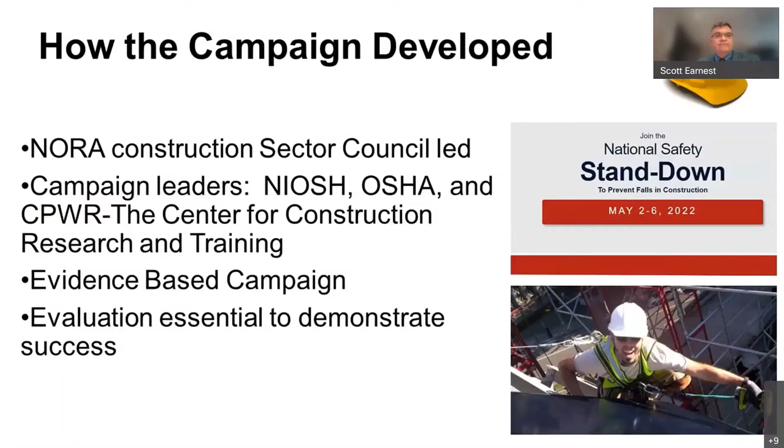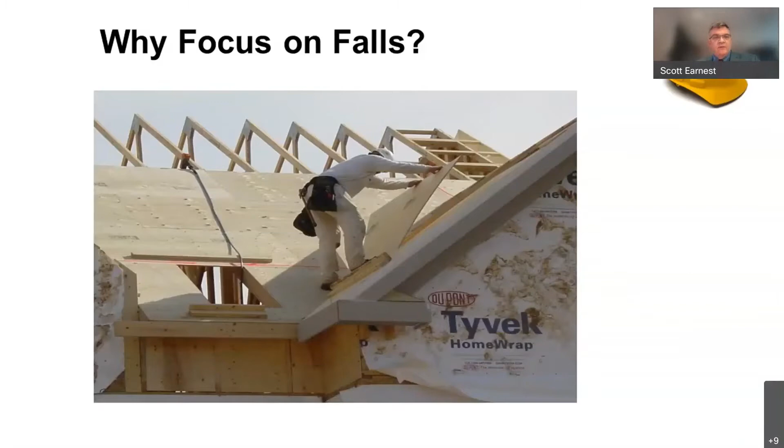Well, again, falls are the leading cause of deaths in construction and unfortunately have been for many years. In 2019, there were 401 fatal falls out of 1,102 total fatalities in construction, and many of those deaths were preventable. By helping to raise awareness about the hazards of falls from roofs, ladders, and scaffolds, the campaign and the stand down are national efforts focused on reducing deaths from construction falls.

Just want to say a few words about the Construction Focus 4 as defined by OSHA. In 2019, the Focus 4 represented 709 deaths, or 64% of all construction fatalities that year. Fatal falls to a lower level climbed to 401 deaths, accounting for more than a third of construction fatalities that year, a 25% increase over 2018.

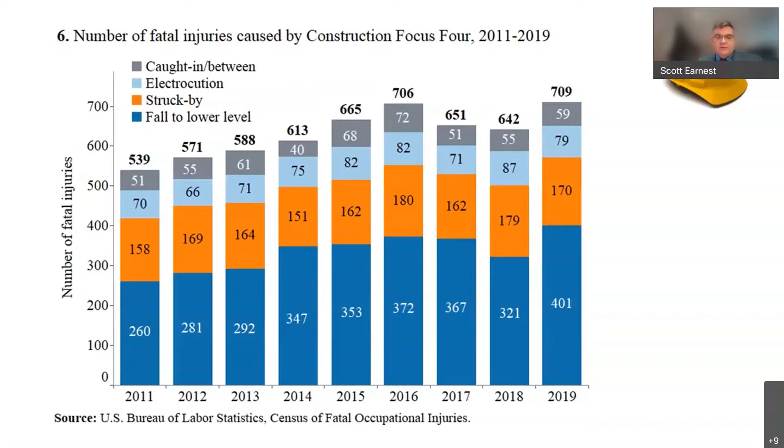And if you look at the other three hazards, caught in or in between, electrocutions, and struck by, they're significant, but they're not to the level or to the number of what falls is. So again, they're all important, but we're really focusing on falls today.

The NIOSH homepage and the resource directory points to the campaign website and the stand down. It also has links to many different resources and tools related to falls and fall prevention. There's also links to the OSHA website, the CPWR website, and I wanted to say CPWR maintains the main campaign website for the overall event.

Now I wanted to talk about looking at falls on a year-round basis. The stand down is 1 week a year, but saving lives is a year-round priority. And here are some reasons to consider expanding your event beyond just the 1 week in May. First, job sites change and crews come and go, but you may have new workers who miss the stand down. Workers have various levels of experience and training, and periodically updating safety training can and will help save lives.

It's human nature to become complacent or overconfident about safety. Scheduling periodic events can re-energize everyone and help to focus on fall prevention. And then lastly, implementing an ongoing fall prevention program is one way to show management commitment, improve supervisory leadership, involve workers in safety, and conduct training.

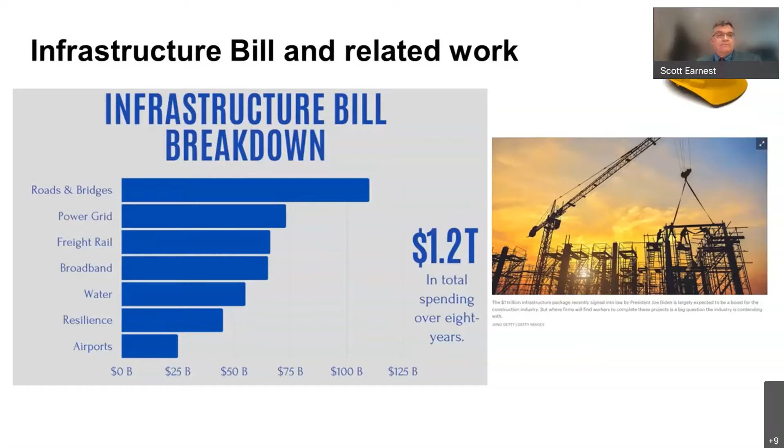The next few slides are information from the NIOSH Fatality Investigation Program. I've got two examples of some fatalities that occurred through falls in construction. The first one occurred in 2017. It was a 52-year-old drywall company supervisor who was setting up mobile scaffolding in the living room of a new home when he stepped onto an unsecured plank in order to hang a piece of drywall.

The metal walk plank that he was standing on flipped on its side, throwing the victim to the subflooring 11 feet below. When EMS arrived, the victim was pronounced dead at the scene, injuries to his head and to his neck.

Before installing scaffolding guardrails, the victim stepped onto the unsecured plank to hang the drywall. His coworker said there were no guardrails because there was insufficient clearance up to the ceiling. The metal walk plank flipped on its side, throwing the victim to his death 11 feet below. Again, when EMS arrived, they could not resuscitate.

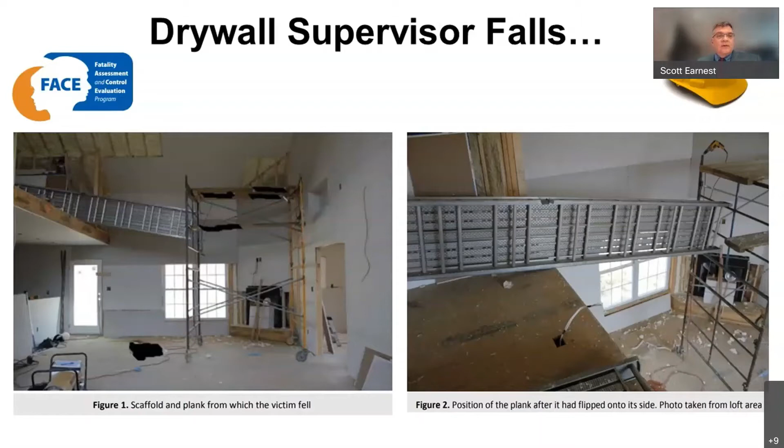In terms of the report that was written after the fact by the investigators, there were a number of recommendations, but the bottom line is fatalities are often the result of many contributing factors in a sequence of events. The investigator identified the following contributing factors in this incident: the fall exposure itself, the misuse of the walking platform, and a lack of fall protection.

Recommendations from the investigators included jobs being designed to minimize fall exposures, making sure that employees are using the proper equipment for work. Employers should ensure that scaffolds are fully planked and decked. And also, workers on scaffolds should always use fall protection, including guardrails or personal fall arrest systems.

The second FACE investigation was another residential roofing fatality. In this case, it was a 37-year-old Hispanic laborer who worked for 1 day, removing and replacing shingles and cleaning up debris. He was wearing a hard hat and a personal fall arrest system that included a full body harness, a lanyard, a rope grab, a roofing anchor, and a 50-foot lifeline.

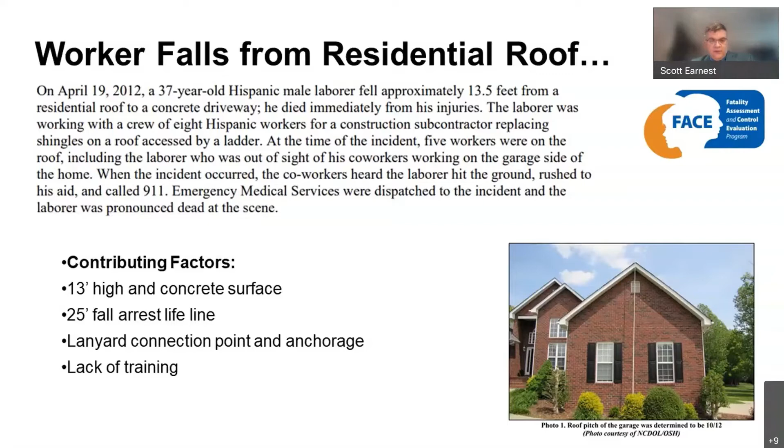This shows some more images from the actual accident. It's believed that the laborer lost his footing, slipped and slid down the roof, falling more than 13.5 feet to the concrete driveway below. During the investigation, they found that the anchor for the laborer's personal fall arrest system had pulled from the peak of the roof.

The investigation showed that the anchor was installed laterally along the ridge of the roof and only had 2 or 3 nails of unknown size holding it in place. The rope grab was attached to the webbing of the harness, and the energy-absorbing lanyard was attached to the roof anchor. The harness, the lanyard, the rope grab, and connectors appeared to be in good condition, but there were damaged fibers on the 25-foot mark on the 50-foot lifeline.

Contributing factors to this accident included the lack of training, an inadequate safety program, and improper assembly of the fall protection system that was being used.

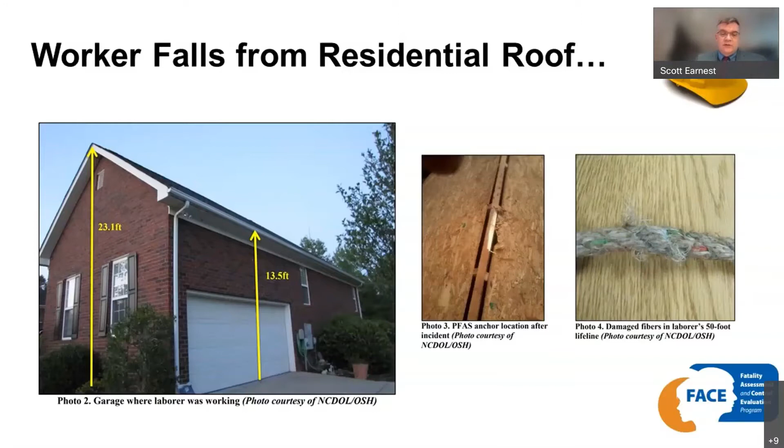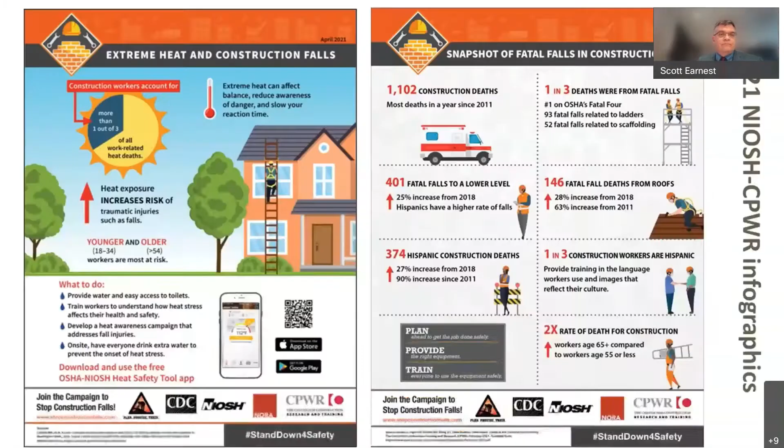I also wanted to touch on some of the newer infographics that have been developed related to falls and fall prevention. NIOSH and CPWR work collaboratively along with our falls work group on our sector council to develop products in both English and Spanish. And this year we developed several. On the left-hand side, we wanted to bring to light the impact of extreme heat on falls.

Construction workers account for about 1 in 3 heat-related deaths, and also we provided a snapshot on the impact of falls for construction workers. And that snapshot is on the right-hand side, showing 1,102 construction deaths, 401 fatal falls in 2019. Again, these products are available as PDFs and JPEG, and there's a whole series of infographics that are available from not only this year, but going back since the beginning of the campaign.

Another product we put out was an infographic related to mast climbing work platforms and safety on mast climbing work platforms. This is based on a project in our Division of Safety Research. If you're not familiar with mast climbers, it's construction elevating equipment that's used to perform work at heights. Mast climbers are equipped with a power drive unit for propelling the work platform up and down on a vertical

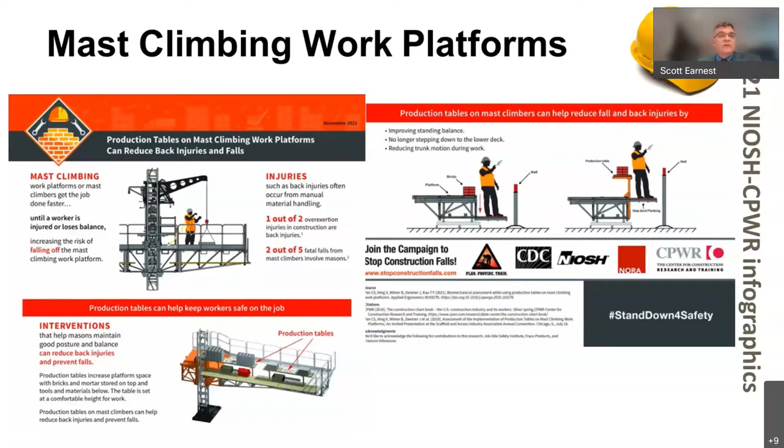mast structure. And this infographic gets into not only the hazard of falls from working on mast climbing work platforms, but also musculoskeletal disorders. A lot of the work that goes on is masonry, a lot of heavy lifting, and there's some design changes that can be done to reduce the risk of MSDs.

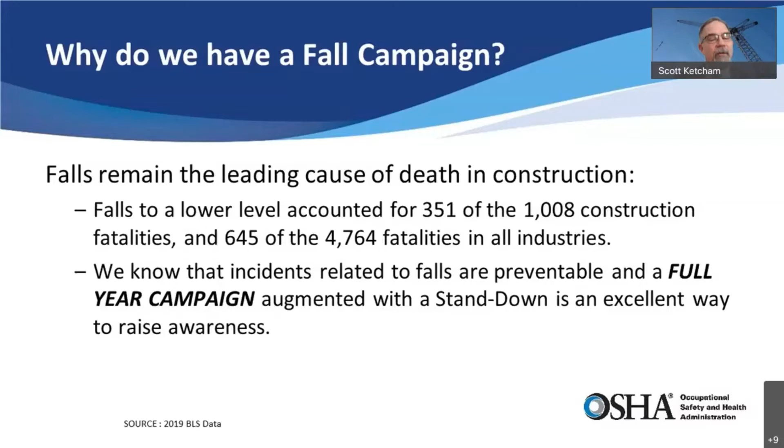And I'm also going to talk about our results from the 2021 stand down, and moving on to ways that we can improve the campaign as well as the stand down for this year. Next, our stand down for this year, if you did not know, is May 2nd through 6th. The stand down is conducted worldwide. I think I've told y'all in the past that the Air Force conducts this worldwide. We have partners within the ASSP and other organizations, unions and trades that all do this worldwide.

And it's really a good time to sit down and focus on falls in the workplace, the ways that we can prevent and survive them, highlight the safety hazards on the job that employees face daily, and discuss the safety policies that hopefully prevent people from falling on the job. It's all about protecting the company's most valuable asset and stakeholder groups' most valuable asset. That's you, people. And that's what this is about.

Okay, a little bit about the fatal fall incidents in construction. This is from the BLS 2020 data. You can see a breakdown here. There were 368 total falls in the construction industry. I mentioned earlier falls from one level to another, but that did not take into account slips and trips. So this number, 368, accounts for the slips and trips in the workplace that resulted in a fatality.

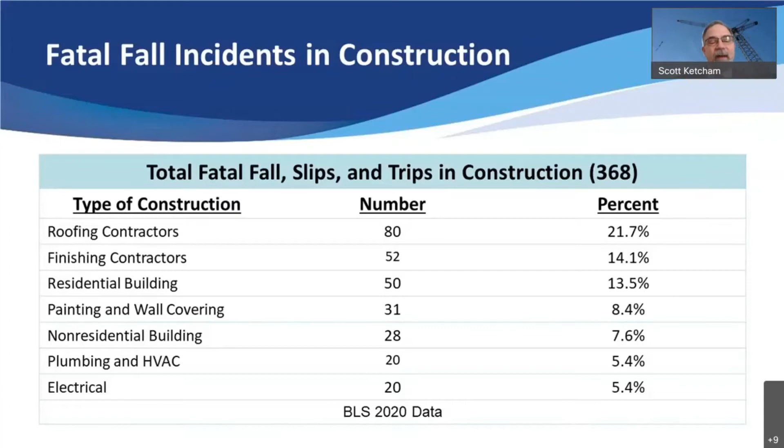And you can see that roofing contractors were on the top of this list with 80 fatalities, or 21.7, 22% of the fatalities. Finishing contractors, residential building, painting and wall covering. These are all the different types of construction activities that employees were conducting at the time of their fall. And so this is the latest data. I just wanted to share that with you, and we'll get into a little bit more detail in a moment on this.

Fortunately, we're seeing a downward trend in 2020, and in 2021, I hope we see even more of a trend. Over the years, we'll do analysis on that to try to determine where our successes are. I'm not claiming success, not until we get down to minimizing that number as much as we can. That's our goal. We'd like to see zero, all of us. So I just wanted to point out those numbers of the total falls. As Dr. Earnest spoke to earlier, it is significant.

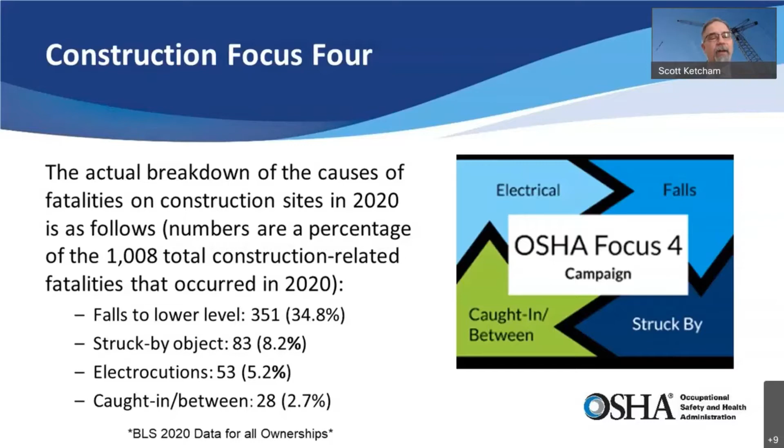And on the construction Focus Four, I'll reiterate that a little bit more. These 4 hazards, falls to a lower level, struck by objects, electrocutions, and caught in between, account for 51% of all fatalities in the construction industry. And you can see almost 35% of those are related to falls. So that's why we're here today, to put the emphasis on trying to do all we can together to prevent falls in the workplace. It's extremely important, and we at OSHA and our partners in NIOSH and CPWR are certainly focused on doing what we can to work with industry and reduce these numbers.

It's important also to bring up the infrastructure bill that was recently passed by our Congress. Over the next period of 8 years, there will be $800 billion to $1 trillion that are directly related to construction. And so there is going to be enormous amounts of work going on roads, bridges, power facilities, upgrades to that. And you can just imagine the types of activities that will fall into the Focus Four, which is falls, struck by, electrocutions and caught in between. So we are focused on that moving forward, definitely with an emphasis on falls.

As we move forward with the construction infrastructure bill, you will see new products that are being developed by OSHA specifically oriented towards those focus 4 hazards, with falls being a major portion of that as well. As we move forward with more emphasis on these infrastructure activities, we're going to have more people working out there in the construction industry, and we want to make sure that we do all we can to get ahead of the risk and marginalize it as much as possible.

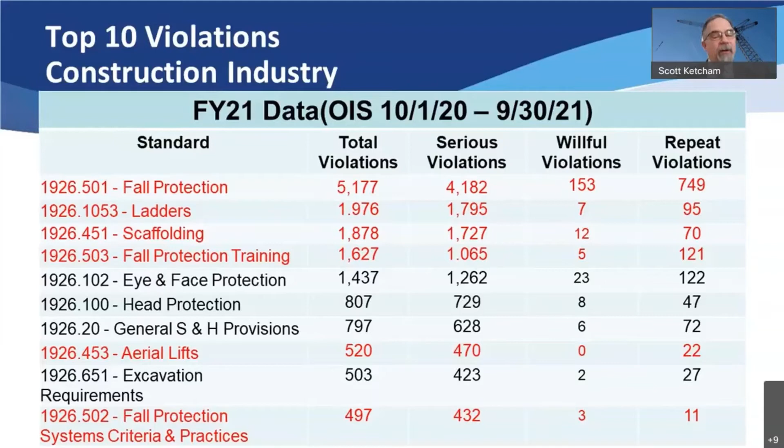And this is the enforcement side on it. You can see where those areas are that OSHA is putting some pressure on the enforcement side. The top fall related conditions for construction obviously are on 1926.501, which is fall protection. You can see again that there was quite a bit of a difference in that on the willful violations and the repeat violations, but also on ladders, scaffolding, and fall protection training, as well as aerial lifts. All these areas, as taken out of the charts previously, show that we are focused on falls, and many of these violations of these standards that are on here are related to falls.

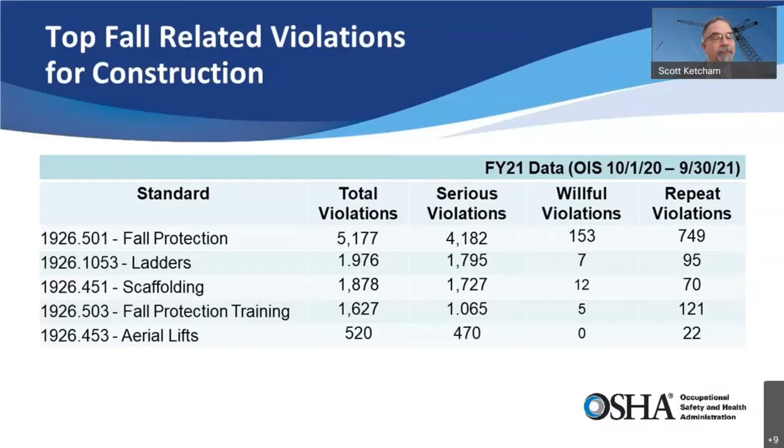Okay, so related to our outreach side and what we're doing on the stand down, I'm going to talk a little bit about where we were last year with the fall stand down, and things we can do that'll help improve us moving forward. I appreciate all the work that people are doing. I know in the last 2 years, we've done many things virtually, and I know many employers are doing stand downs with the workforce out on construction sites. So there's a mix of how the stand downs are being communicated, but I'm very happy to say that we've been able to reach quite a bit of people virtually, and we're also looking to get back out to physical interactions with workers in the physical workplace as well, and utilizing both techniques.

And granted, we all know that we've been focused on the pandemic and the pandemic's effects on our workforce. And so we're going to do all we can this year. But as I've said before, we're going to have to see where the conditions of COVID are at the time of this year's stand down to make some assessments on exactly how far we're going to move in regards to our participation physically out on sites. But it's been a tremendous success over the last 8 years. Millions of workers have been reached since 2014 when this was kicked off with our partners. And again, these are reported in all 50 states.

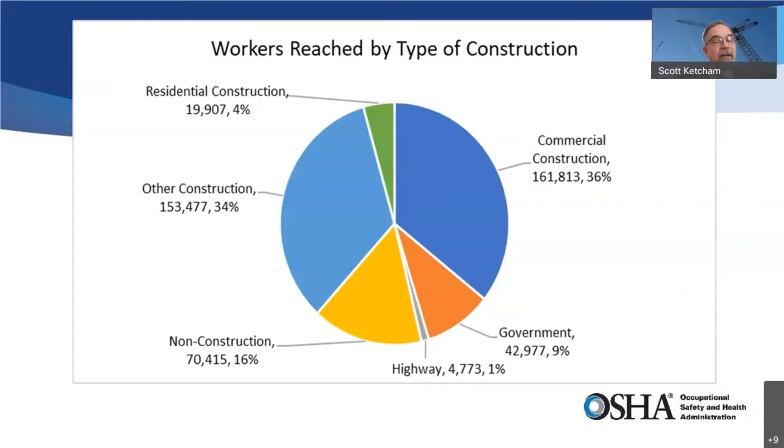Workers reached by type of construction. You can see that 162,000 or 36% were in commercial construction. 34% was in other construction. You can see that 16% weren't in construction. This is the breakdown of the certificates that we got in 2021. And so I just wanted to show you who is participating, at least from what we see from certificates that we receive.

So there's a broad range in there, but obviously fall protection is one of the highest mentioned of all the topics that come up relative to the stand downs that employers and associations hold.

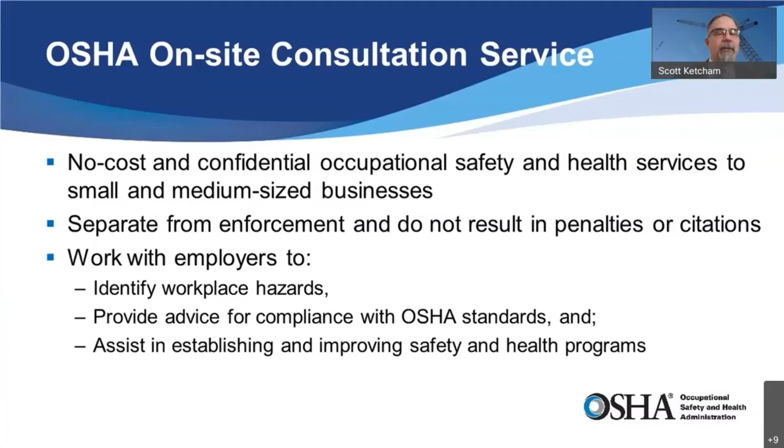And what they do is, it's free. They work with employers to identify the hazards, provide advice for compliance with OSHA standards, and assist in establishing and improving safety and health programs, which is the key to prevention of many different safety and health hazards that are out there. Safety and health programs. So I wanted to end this with giving you some resources of ours and our partners.

I mentioned consultation. There's the consultation web location. Compliance assistance is also on there, and our Stop Falls webpage, as well as CPWR Stop Construction Falls. Excellent resources. Please utilize any of these. You saw the infographics that Scott Earnest provided earlier from NIOSH. If you go to the Stop Falls campaign on the NIOSH page, there's plenty of infographics that will help you do a fall stand down this year and lead it to success.

So what I would end this on is, I am looking forward to another successful year and hopefully doing all we can together to curb the fatal falls in the workplace, and to educate employees and the workers, all workers, to prevent these falls. And hopefully we can move the needle on this.

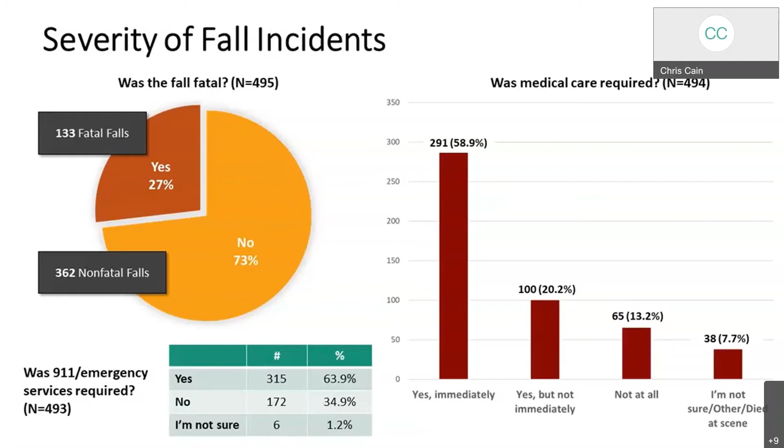Looking at the numbers in a different way, of the falls that occurred above 40 feet, 65% were fatal. It's important to note, however, that more than 5% of fatal falls happened at less than 6 feet, highlighting the fact that even shorter falls can lead to serious and even fatal injuries.

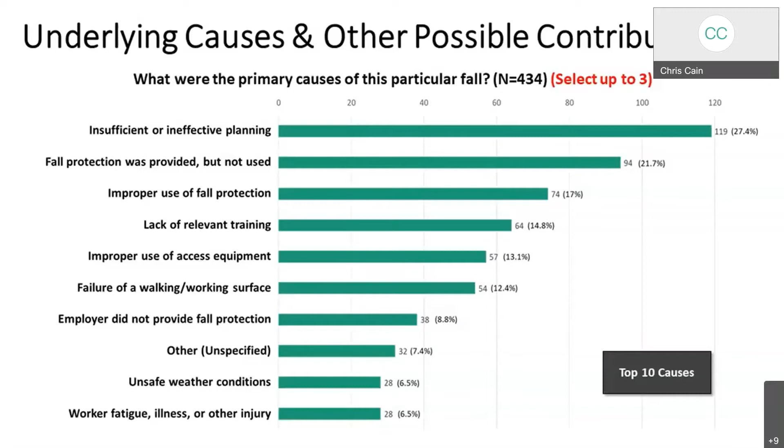When asked about the level of planning prior to the fall incident, only 21% indicated that no planning was done, although others were unsure. Still, respondents indicated that for the majority of incidents, some level of planning was done. But we know from the earlier question about underlying causes of fall that whatever planning was done was often insufficient.

The most often selected type of planning conducted was pre-job planning, followed by review of a job site hazard analysis or job site safety analysis before the work began. It was much less likely for the employer or competent person to have engaged in pre-bid planning or any type of rescue planning. For example, when reporting on fatal falls, only about 13% of respondents indicated that rescue planning had been done.

One area that we did not ask about that could be investigated further was the quality of the planning. For example, did they consider specific hazards, circumstances, and crews for each job site, or did they copy and paste plans from the last job?

Overall, the majority of those who fell did have at least one type of training, with about 31% of respondents indicating that there was no training or they weren't sure, and 69% selecting at least one type. Looking across the board at different training types, there are a few types of training that seem to help prevent fatalities. For example, looking at the importance of self-rescue training, especially considering the earlier finding that self-rescue was a primary method of rescue used, only 5% of those who died had had any training in that area.

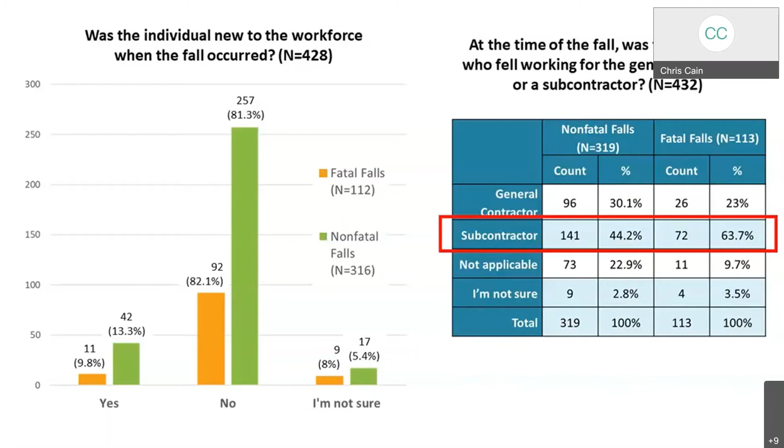In looking at other factors that may have contributed in one way or another to the fall, we asked respondents whether the individual who fell was new to the workforce, which did not seem to be a significant factor. However, when we asked about whether the individual was working for a general or a subcontractor at the time of the fall, the results suggest that those working for a sub were at greater risk, particularly for fatal falls. While 44% of those who experienced a non-fatal fall were working for a subcontractor, 64% of those who died were employed by a subcontractor at the time.

Continuing down the list, when it comes to practices involving new workers, we asked how often respondents saw proper supervision by a competent person, and only 41% said always or frequently. A full 56% said occasionally or never. Responses about how often new workers were properly trained before being exposed to fall hazards was slightly more encouraging, with 53% saying always or frequently, but 44% still said it was occasional or never.

When it comes to personal protective equipment, responses showed that while it is often provided by employers, improvements are needed when it comes to fit and active enforcement of fall protection requirements, which, as we said earlier, is a big indicator of whether PPE is properly used.

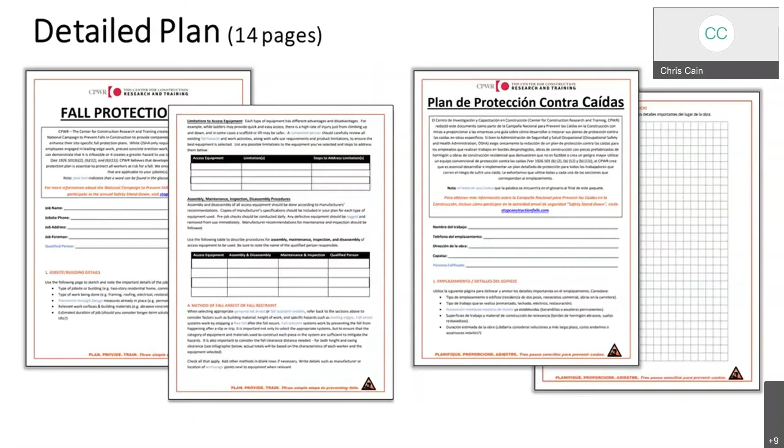However, for those who are interested in creating more detailed plans, we also have a much longer option that provides a glossary of definitions and links for additional information throughout. The detailed plan includes a subsection on rescue to ensure that there is a plan in place beyond just calling 911 and that workers are trained properly. Finally, we also have a daily checklist in that section that can be downloaded and used on site to check for hazards and also track training of employees.

Another planning resource we have is a list of activities for an ongoing fall prevention program that keeps safety front and center for both leadership and workers. On the site, you'll also find various resources that can be used for training workers, including all of these things: toolbox talks, hazard alerts, infographics, videos, FACE reports, and other real life stories, other handouts, hard hat stickers, research findings, and resources from our data center, which I'm going to review on the next slide.

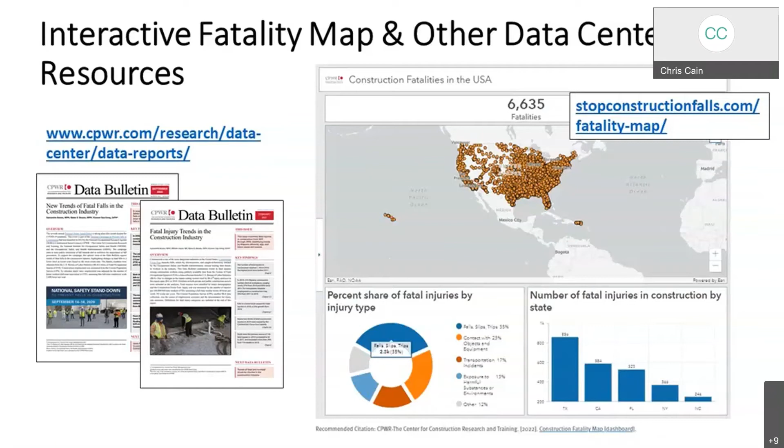CPWR's data center is very prolific. And if you're familiar with our Stop Construction Falls website or our data center web pages on cpwr.com, you might already know about our fatality mapping project, which tracks fatalities across the country using pins on maps that can be clicked on for more information. The whole project was recently given a facelift and updated with new data, and is now one of the data center's interactive dashboards, and allows you to manipulate the data in numerous ways to look at fall fatalities across states and across time periods. In addition, the data center puts out about 6 data bulletins each year, several of which contain information about fatal and non-fatal fall trends in construction.

Finally, as we approach the May 2022 stand down, I want to remind everyone that we maintain that one-stop stand down shop with easy access to everything you need to hold a stand down. We include resources from all 3 of our organizations here and add to the collection regularly as new resources are developed leading up to each year's stand down.